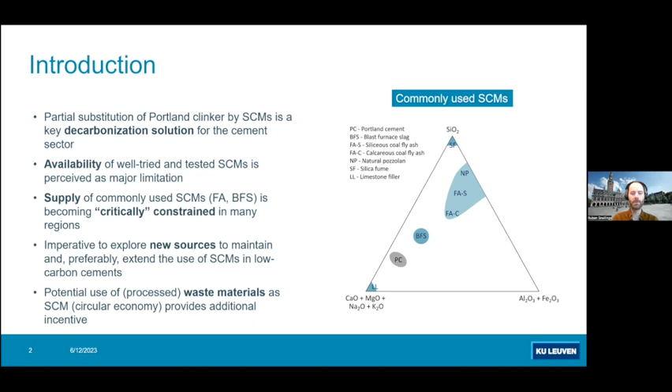When going through the literature, we try to make a classification of materials used today and materials that are emerging. By emerging we mean new materials that are fairly well tried and tested, but still yet emerging on markets - maybe not in Sweden yet, but for instance in France or the USA, they have been accepted by local standards.

In fact, it seems from the literature that most concerns in terms of their use have been resolved. Not all - there might be some open question marks, perhaps in durability, or some drawbacks, perhaps in workability and so on.

But what is striking, if we look at the chemistry of those materials we classify as emerging, is that they're fairly close still to the chemistries of the materials we know well - blast furnace slag, fly ashes, and so on. For instance, calcined clays are fairly close in composition to fly ashes, while recycled concrete fines are somewhere in between quartz and Portland cement, or silica and Portland cement.

So they all plot in this sort of upper part - I'm going to use the laser pointer - they'll all plot in this upper part of the ternary diagram.

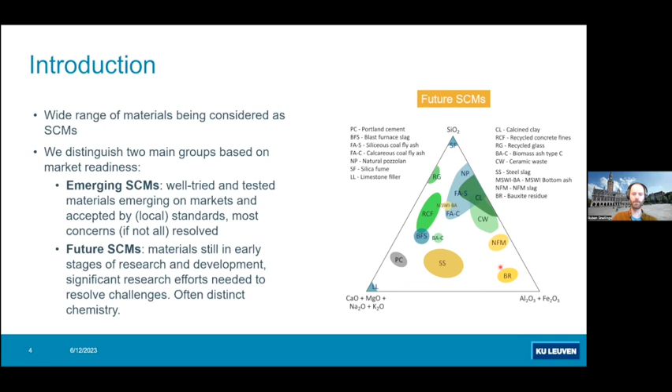An important point to make is that many of these materials require processing - we call that beneficiation processing. So from a waste material or a low value material, we process it and make it a suitable SCM. This area seems to be an area of intensive research.

Many researchers are looking into ways to upgrade or upcycle ashes or slags of some sorts, or even recycled concrete fines. And it's actually in the combination of the processing and then the properties of the end product that most innovation is happening today.

In general, if you look into what processes are being used, they could be classified as a function of their processing intensity. We can have fairly low intensive processing, such as drying and classification methods, which are used today. Comminution is also fairly common to the industry - of course, when we have natural pozzolans or slags, we might need to mill them to some extent.

But there's more intensive processing also being explored. Wet processing, washing, leaching in some cases, has been seen as quite effective in improving properties or resolving issues with some SCMs.

Carbonation - mineral carbonation - is something really in the spotlight today for recycled concrete fines, for instance, where the CSH or the calcium hydroxide is carbonated and produces a material which is both reactive and can store CO2. Moving up the ladder, we go into even more intensive, energy-intensive processing.

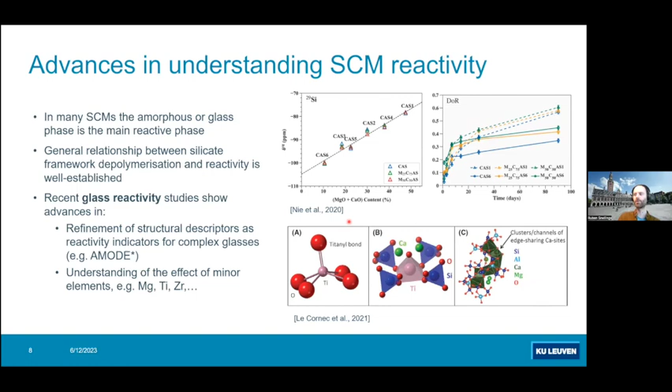So there's continuous advancement in really trying to understand the basics of the chemistry of reactivity of glasses and SCMs. But that's good to know. Obviously, in practice, we also want to have ways to evaluate them more directly in terms of performance or reactivity. And there's been, in the last few years, quite some developments in reactivity testing.

Reactivity testing of an SCM is obviously only a first step in a series of performance-based tests. So as you can see here, an SCM test is a first step, but screening is already very interesting to optimize processes, but also to eliminate off-spec materials or to focus on materials that are most of interest for cement and concrete producers later on.

Obviously, there are other key characteristics, durability, environmental compatibility, that need to be tested other than reactivity. But reactivity is often seen as closely linked to performance and durability, so a good indicator, at least, of what an SCM could do in a cement or in a blended cement.

So about these new test methods, there is a test method being forwarded by a RILEM committee and also adopted by ASTM now, which is called the R3 test. It's an SCM reactivity screening test in which the SCM is tested in a medium which is closely resembling the pore solution of a Portland cement.

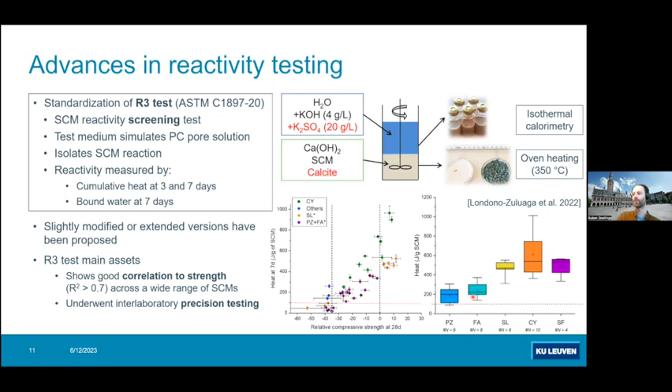And there's been an establishment of where typical materials would plot in terms of reactivity, pozzolans, fly ashes, slags, and so on. The R3 test can be extended.

There's some research on that aspect as well to measure calcium hydroxide consumption in the same mixes. This is a bit more challenging to measure accurately because we are in a mix where we have quite some calcium hydroxide from the beginning. So consumption measurements by, for instance, thermal analysis, are a bit more challenging.

But there's also good correlation to the heat release or the bound water there. But this depends a bit on the SCM composition. Obviously, if you have a slag which is calcium rich, it may consume less calcium hydroxide for a given degree of reaction than a fly ash, which is mostly siliceous.

Calcium hydroxide consumption can be interesting for some durability aspects which are particularly linked to calcium hydroxide presence, such as calcium oxychloride formation, where good correlations have been seen, and ASR expansion. Obviously, reactivity can give indications on durability, but it's not as easily linked as to compressive strength or other performance parameters. Durability depends on many different parameters and is in general more complex to understand.

However, screening a filler material from a reactive material is still very valuable because we know that cements containing reactive SCMs are usually more durable than cements containing fillers.

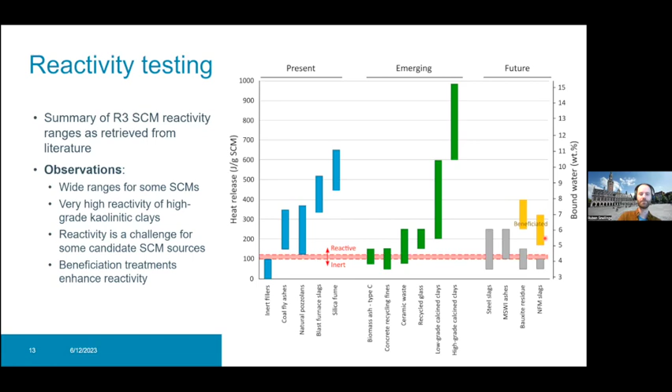Saying that, it's important to stress that it's not only reactivity which should be kept in mind for new SCMs, it's also environmental compatibility, health, environment, safety issues. These are imposed by legislation, so obviously we have to protect humans and the environment from potentially hazardous materials.

Methods are usually available and harmonized. Limit values typically are nationally imposed, and I would not know how it works exactly in Sweden, but in Flanders it works, in Belgium it works a certain way, in the Netherlands slightly different, and so on.

The typical parameters you might want to look at are heavy metal contents, and in particular whether these heavy metals are mobile. Emissions can happen during the first life when the concrete is in place, or during the second life when it's crushed and used again as, for instance, a road-base material.

Radioactivity is another one. Some of these SCMs, for instance these non-ferrous metallurgy slags, but also phosphogypsum, may contain traces of radioactive elements, so should be tested also in terms of gamma ray radioactivity.

And finally, it's also quite important to follow up on respirable crystalline silica content, where crystalline silica should be less than 10 weight percent in the below-10-micron fraction.

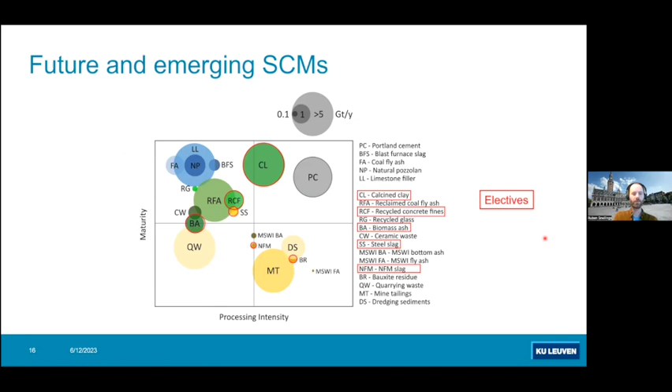There's not enough time to go over all of these materials. Calcined clays, I trust, if not me, somebody else will introduce. Calcined clays are one of the most promising SCMs in terms of reactivity, performance, and availability.

We see that these ternary mixes of limestone and calcined clay cements are really reaching the market today. Perhaps not in Sweden, but in Denmark, Belgium, France, many places in Western Europe, we start seeing the first calcined clay or limestone calcined clay cements reaching the market. So this is to some extent already known.

What we see beyond these LC3 cements is that recent studies show you could also try to use mechanochemical activation, so intense milling, as an alternative to thermal treatment, in particular for those clays that are a bit less reactive—the smectitic or illitic clays, not the kaolinitic clays.

Co-calcination of these so-called illitic or smectitic clays with some fluxes or materials containing fluxes such as calcium, sodium, or potassium can increase the reactivity by enhanced formation of reactive amorphous phases.

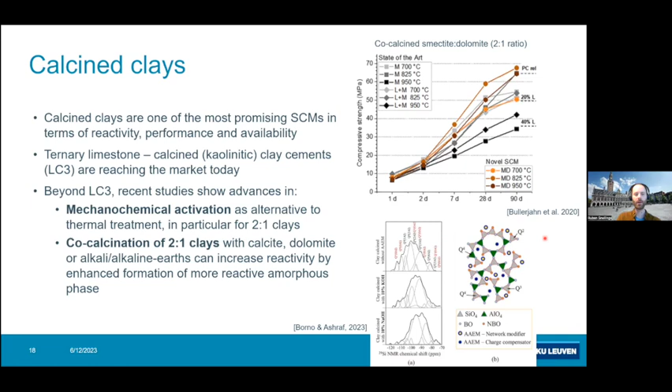A recent study showed that on a global level there's really large potential if one would be able to actually source and bring together all of these end products or waste products from biomass. You could have up to a billion tons of materials available every year.

However, that really makes abstraction of many other useful uses of these materials, such as soil amendments, and the fact that logistics can be really complex and costly. So it's still to be seen in what constellations biomass ashes can really serve as a good supply of SCMs. There might be local situations where this is actually useful, but in many places this doesn't make much sense.

On a material level, what's known from recent studies—and it's actually confirmed across a wide range of biomass ashes—is that depending on the biomass source, whether it's herbaceous, woody, or animal, you really have very different ash compositions. So you really have to be careful about what materials you're taking in and what the source of the biomass is.

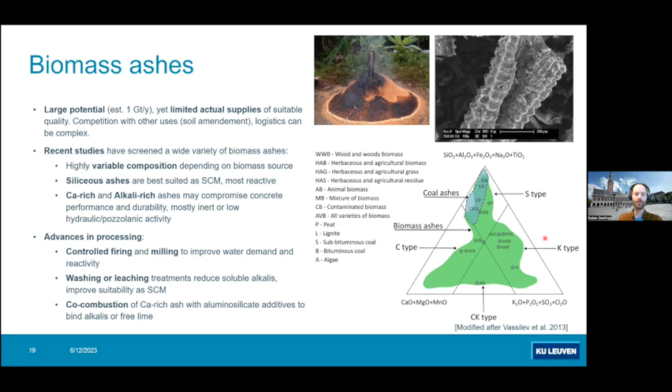If there are issues with soluble alkali, washing or a leaching treatment can help, as well as trying to co-combust. This is already done sometimes by standard in energy plants to reduce slagging of the ashes during combustion, by adding aluminosilicate additives. This can be other ashes, or clays for instance, which also produce a reactive material.

Another important one is recycled concrete fines. Obviously they're available in most developed countries and will become more available in the next decades as many structures reach end of service life and need to be refurbished, replaced, or recycled. An important fraction of concrete recycling are the fines, typically between 30 to 40 to 50% of the recycling output.

In many cases, when used, this is considered as inert. However, lately researchers, for instance from Heidelberg Cement, have intensively worked on carbonation of RCF, where using a wet or moist process they were able to make calcium hydroxide, CSH, or calcium aluminate hydrates in the RCF react with CO2 to form calcium carbonate and silica or alumina gels, which can be highly reactive.

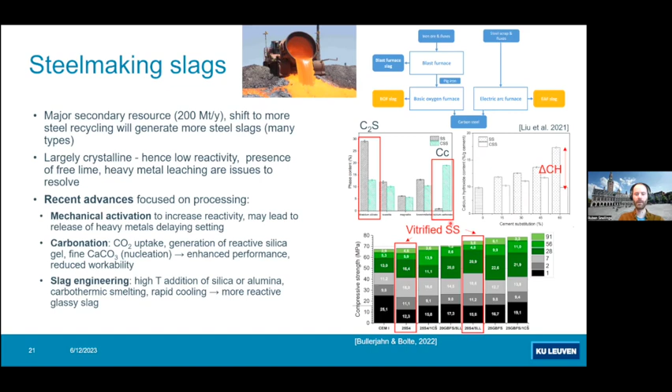Maybe to wrap up, a final one to go: non-ferrous metallurgy slag, something we have been working on a lot in Leuven as well. This is probably a more local secondary resource - we have a lot of it in Belgium, and I suppose you also have some in Sweden. The majority of this is generated in copper production, and it consists mainly of iron silicates. In its regular form it's a crystalline, hard material, used for instance for abrasive properties, and as given, these are very lowly reactive or inert, and might even have some slight retarding effects.

Recent advances go a bit along the line of what we've seen for steel slags, trying to modify the composition of the slag at high temperature - adding calcium and aluminum will have a massive effect on the reactivity, creating a more reactive material. If you then quench the slag, making it amorphous, you retain reactivity and strength contribution. Typically this strength contribution would be comparable to siliceous fly ashes. On the other hand, you resolve the issue that many of these slags don't currently have applications. It should be said they have significant levels of heavy metal, so if you can reduce heavy metal leaching, or recover heavy metals at the same time, this is beneficial. What's interesting is that the chemistry is quite different - it's mainly iron and silica, and divalent iron seems to be mobile in the reactions and can be incorporated into a new type of layered double hydroxide, a bit like an AFm structure, amongst others.

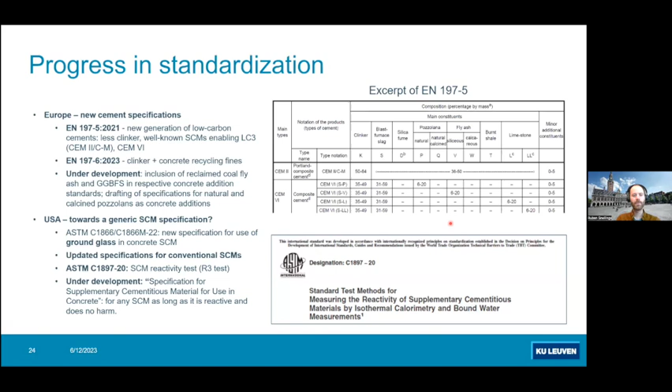Perhaps it's also interesting to look across the Atlantic. There we have the move towards new specifications for ground glass, updates on conventional SCMs, the introduction of the reactivity test - the R3 test - and the development of a general or generic specification for SCMs for use in concrete, for any SCM regardless of its origin. That's actually also perhaps one of the ways forward for new SCMs - not only to adopt materials that have been accepted in cement standards, in concrete standards and beyond. That's an obvious first step to facilitate this, but also to provide better guidelines for what we need to comply with if we develop new SCMs, and how to introduce them.

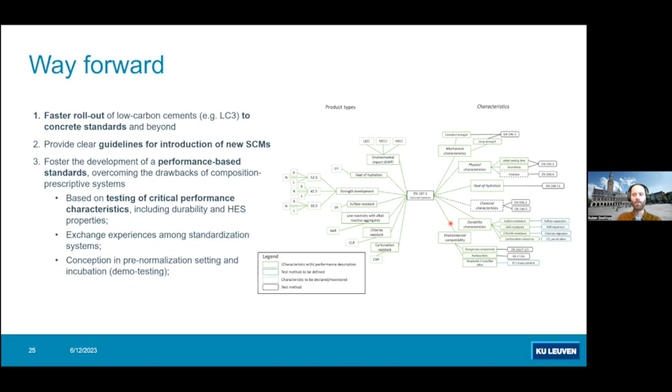Finally, a more audacious step is to try and foster the development of a performance-based standard also on the cement level, that will try to overcome some of the drawbacks of the current composition-prescriptive system, where we have this plethora of different SCM cement types that we have to specify again and again, which might become quite complex and confusing in the long run.

So my conclusion is that there's a transition to new SCMs that is gaining momentum. We see global emergence of previously only locally used SCMs, off-spec materials being used, novel combinations being introduced, and also some new SCMs such as glass pozzolans or concrete recycling fines starting to emerge.

For other SCMs, we see there are some challenges that need to be resolved, typically low performance, and incompatibility, including environmental incompatibility. This implies that if we want to use such materials with these challenges, we will need to adopt intensive processing beyond the milling that we do today, and cement producers may need to move a step further into also processing their SCMs rather than just adopting them into their processes.

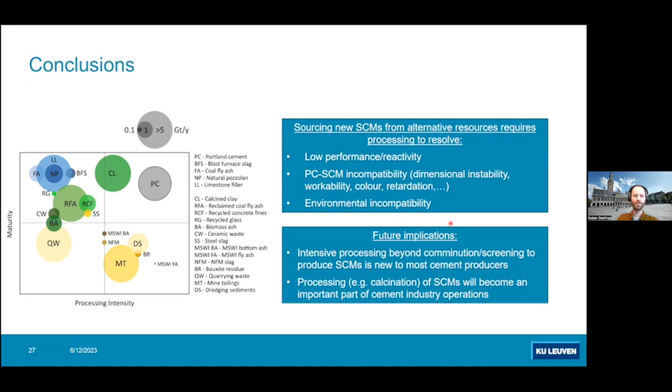Thank you, Ruben, for a very nice presentation. As we can see, there's been quite a lot of development. Since we're a bit short of time, I'll ask one question, and the audience can send questions to me, and we'll see if we can answer them.

Looking into the cement industry's roadmaps that have been developed, looking at what they think about alternative binders, they seem to think this has quite small potential, talking about 5 to 10%. What do you think about the future? Will we see more blended materials?

Yeah, in my view, their position is quite conservative on this respect, and I think there's much more possible, maybe even double or triple that, by moving towards really low clinker blends. I think in the development of the roadmaps, the SCM part has mainly considered these current well-known SCMs and their supplies. There you're more limited, because you won't find much more GGBFS, you won't find much more coal fly ash around. So I think this was the main limitation. I would expect that we could do more in terms of clinker replacement, actually.

That's really good news, I think. Okay, thank you, Ruben, for a very nice presentation, as I said, and then we give the word to Klaartje.

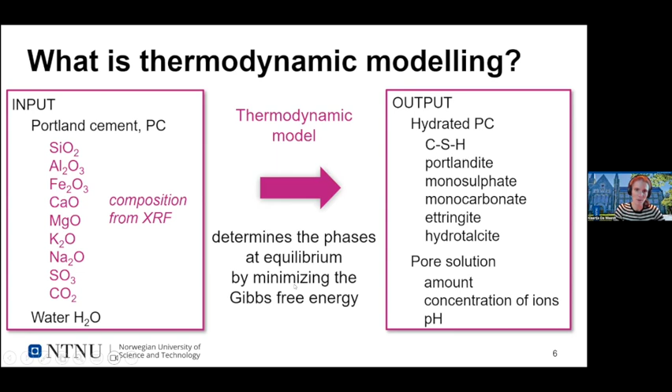So this is actually what thermodynamic modeling does. It calculates, based on this input, the output, and determines the phase assemblage at equilibrium by minimizing the Gibbs free energy. In order to do these calculations, we need thermodynamic data of the phases that form and also of the aqueous phases. This thermodynamic data allows us to calculate which composition of these phases will give us the minimum Gibbs free energy.

The most recent one is Cemdata18, and it gives us the thermodynamic data of your AFM phases, AFT, hydrogarnet, CSH - the typical phases you would find in a hydrated cement. All this data comes from solubility measurements at different temperatures where you also analyze your solid phases, so a lot of work lies behind that data.

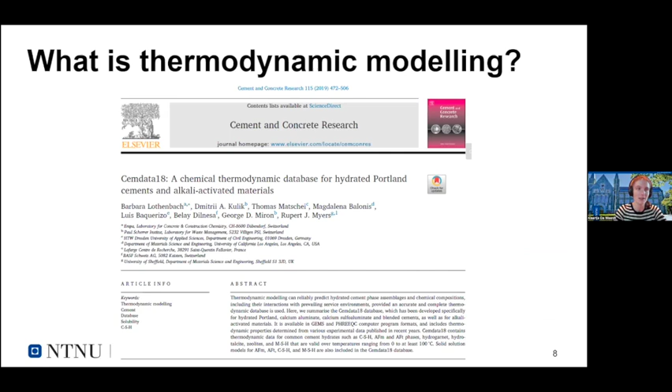The wonderful thing is that all this data is available for all of us. Cemdata18, the most recent cement-specific thermodynamic database, is published in Cement and Concrete Research. In this publication you'll find tables with all the typical hydration phases in a hydrated cement - for example AFT, hydrogarnet, AFM - and you'll find your Gibbs free energy of formation, enthalpy, entropy, temperature coefficient, and molar volume. And not the least, you get to know who did the hard work to get you those numbers, so you get the references of the publications. Note that some of these lines represent work for an entire PhD.

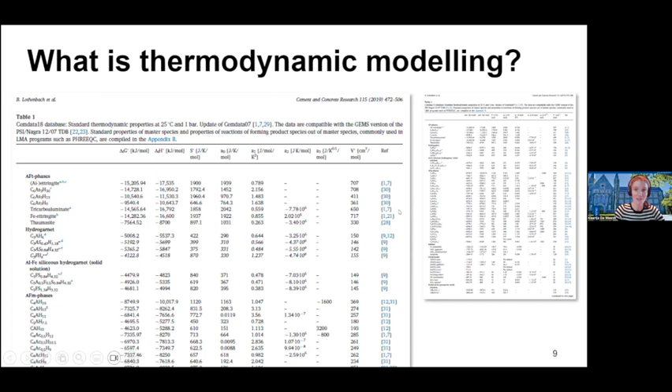So now we have all the tools to do thermodynamic modeling. Let's try to do this for a Portland cement. We need the composition of our Portland cement to calculate the hydrated assemblage and the pore solution.

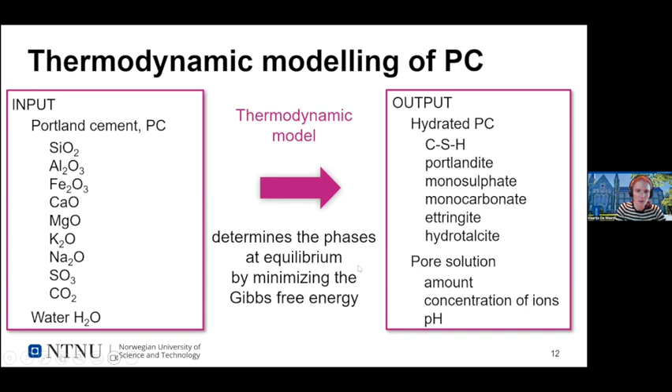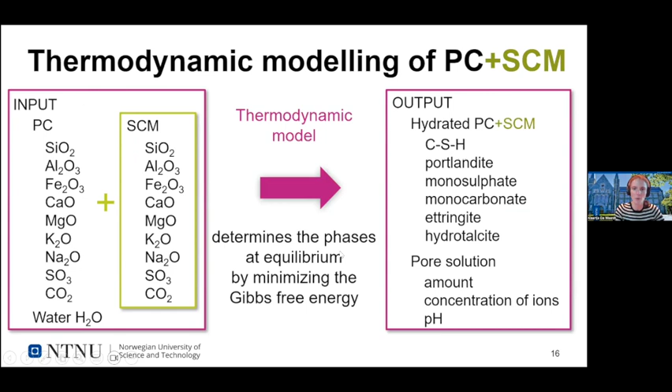So this is what I could do for Portland cement. What happens if we want to include an SCM, a supplementary cementitious material? We need to know the composition of our SCM. We could add it also as an oxide composition and then see how it influences the output of our thermodynamic calculation. But here is a tricky part.

What do we enter as the SCM composition? You could use the entire XRF, the total XRF of your SCM, but as Ruben said earlier, quite a bit of it can be crystalline and inert. So if you're able to quantify the crystalline non-reactive phases - just as examples, quartz, mullite, hematite - you could check the oxide compositions of these and subtract them from the total oxide composition of your SCM, thereby getting an idea of the composition of the reactive part of your SCM. Then include this into your thermodynamic modeling, because that's actually what's going to go into the system. But this can be a bit challenging.

When we've done that, here on the left we have the figure for pure Portland cement, and on the right I've replaced 30% of the Portland cement with calcined clay. You can see that this changes the oxide composition of your total cement, giving less calcium oxide and more silicon oxide, aluminum oxide, and iron oxide. Again, I let it react with 50 grams of water.

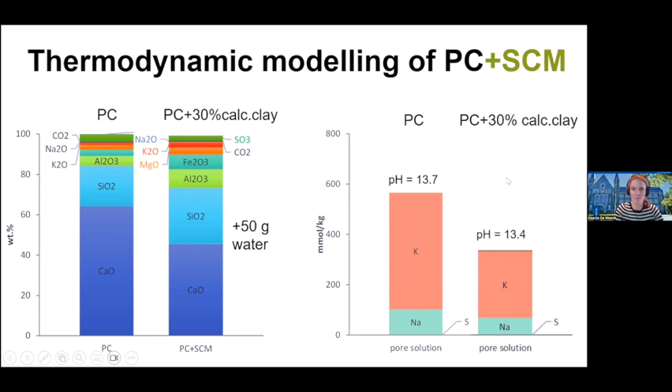So you can see that the pozzolan or the SCM greatly affects your phase assemblage. It doesn't only affect the solids, it also affects your pore solution composition. Comparing pore solution compositions, the calcined clay considerably reduces the potassium and sodium in your pore solution, and thereby also the pH. These are also things you can use CemGEMS for, to calculate how that would change depending on your SCM.

So this was a very fast crash course on how we use thermodynamic modeling to look at hydration and how SCMs affect our hydrate assemblage. So how can we use this in the context of concrete durability? I'm going to give three brief examples of how we've used thermodynamic modeling to look at durability. But there's much more. Because of time limitations, let's look into these three examples.

First, alkali silica reaction, or ASR, and a very brief repeat of what ASR is. We need alkali originating from our cement, which lead to the high pH of the pore solution, as we just saw. We need the presence of excess moisture, water, and a reactive rock containing reactive silica. This reactive rock will react in the high pH environment and with the additional water to form reaction products such as alkali silica gel. ASR leads to expansion and cracking of the concrete. It's a slow reaction, but we have quite some trouble with it here in Norway.

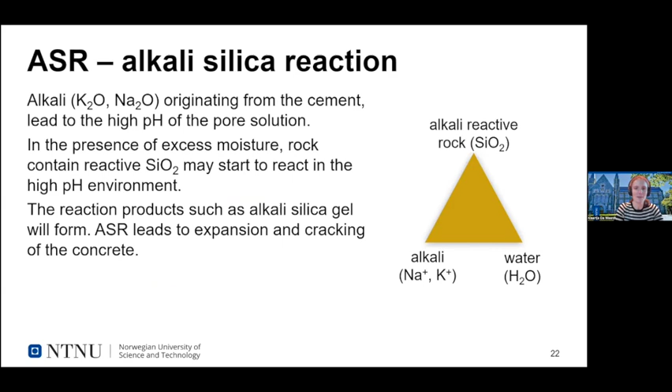But where do SCMs come into play here? The role of SCMs when it comes to ASR is they can reduce the alkali concentration in the pore solution and thereby mitigate these deleterious expansions. So the SCMs will reduce the amount of available alkali for the reaction.

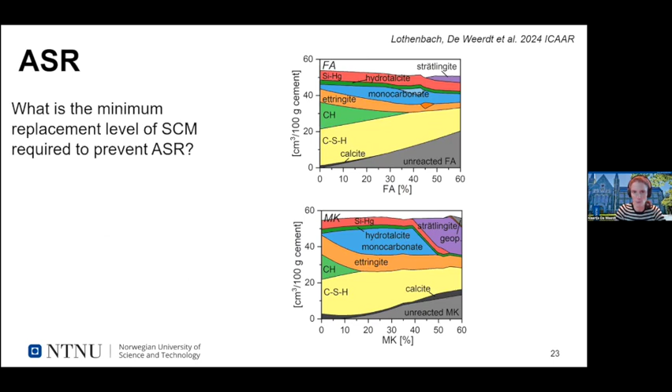This is something Barbara and I wanted to look into in connection with a publication we wrote for the upcoming ICAAR conference. We wanted to determine the minimum replacement level of SCMs required to prevent ASR. In other words, we want to know which replacement level lowers the alkali level in the pore solution below a specific limit. Here we assumed 300 millimole per liter. We did some literature search, and this is a lower limit that counts for many aggregates, but note that this limit is dependent on how reactive the aggregate you're looking at is. But we took, for simplicity, 300 millimole per liter.

We used SCMs to see how the replacement level of various SCMs affects the alkali concentration in the pore solution. Here I just took a few examples, but in the paper there are more. We did this for fly ash and metakaolin. What we do is look at the volume of the hydrates formed per 100 gram composite cement, and we vary the replacement level of the Portland cement with fly ash, going from 0 to 60 with fly ash and 0 to 60 with the metakaolin.

When we look at the hydration phases, you can see that the pozzolanic reaction of fly ash and metakaolin leads to the consumption of your Portlandite, as we've seen earlier with the calcined clay. Then you get more CSH and more AFM. You can see this even clearer for the metakaolin. Also note that we put a limit to the reaction degree of the fly ash and the metakaolin, and that's actually based on one of the figures Ruben showed in his talk.

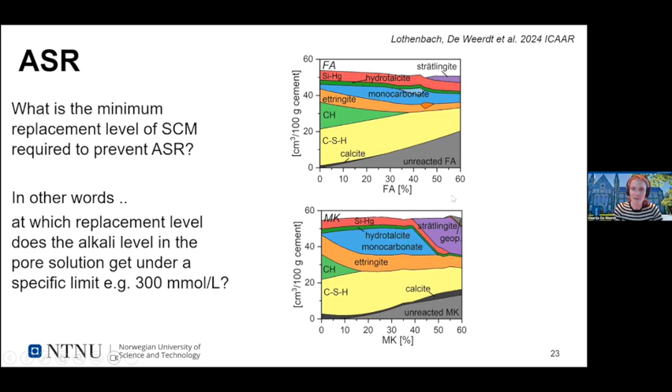So here we have the phase assemblages and how they change with the replacement level. But what we're actually after is how that affects the alkali distribution. We know that sodium and potassium will distribute between the pore solution, CSH, and the unreacted Portland cement and SCM.

Here I show the example for fly ash, and I split up the effect for sodium and potassium. When we look at potassium, we see that a large part of it is in the unreacted fly ash, part is in the CSH, and part can be found in the pore solution.

When we plot the potassium and sodium concentration in the pore solution as a function of the replacement level, I did this for fly ash and metakaolin. You also see some points here, which is experimental data we found in literature. The green line is for sodium concentration, the blue for potassium, and the red line for sodium and potassium concentration in the pore solution as a function of replacement level.

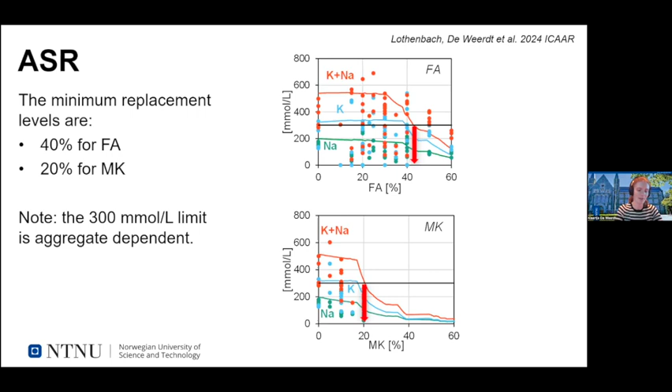We assumed a limit of 300 millimole per liter, shown as the slightly thicker black line. What we can see is that for fly ash, the total alkali concentration in the pore solution drops below this 300 millimole per liter at a replacement level of approximately 40%, whereas for metakaolin this already happens at a replacement level of 20%. This gives an indication of how much SCM we need to include in our system to try to mitigate ASR, and there GEMS can be a very neat tool.

So this was an example for how we use thermodynamic modeling to predict potentials of ASR and the impact of SCMs. Now let's look at an example for carbonation.

We looked at a pure Portland cement and a Portland cement with 30% fly ash. We simulated carbonation by exposing the hydrated paste or mortar to increasing levels of CO2, starting with 0 grams CO2 and increasing the level our cement paste or mortar is exposed to, then calculating the equilibrium phase composition upon exposure to this CO2.

Focusing on the Portland cement, the first thing that happens upon carbonation is that Portlandite is predicted to decompose and form more calcite, the darker green phase. In order to have all Portlandite reacted with CO2, we need a certain level of CO2. For the fly ash cement, the pozzolanic reaction has already consumed quite a bit of this Portlandite, so we need much lower levels of CO2 to consume all of it.

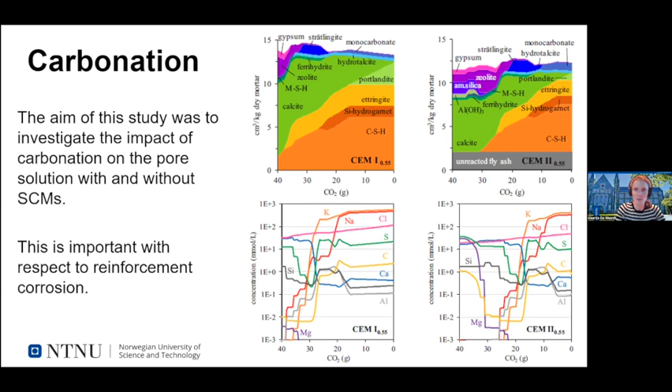But in order to know which phase assemblage we approximately had in our fully carbonated mortar, since we combined this with experiments, we matched the carbonation state in our experimentally exposed samples to the calcium carbonate level which was modeled - the model calcium carbonate level is the green line. We had measured in our fully carbonated mortar a level of about 20% calcium carbonate, so our fully carbonated mortars were equivalent to the phase assemblage at about 34 grams CO2.

We did the same for our fly ash cement. We had less calcium carbonate there, with an equivalent CO2 level of about 27. So in these graphs we're approximately at this phase assemblage, and then we extracted the pore solution composition at this point and compared it with some experimental results.

This is where Gilles used his cold water extraction technique to try to obtain pore solution composition in these carbonated mortars, and we compared the experimental results with the modeled ones.

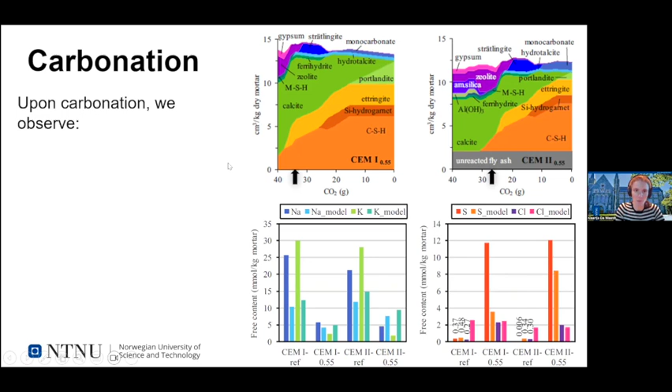The first conclusion is quite obvious. When we compare the references, non-carbonated with the carbonated ones—blue bars for sodium and green for potassium—we see a decrease in sodium and potassium in both investigated cements. A decrease in available sodium and potassium means a decrease in OH minus, and therefore a decrease in pH and a depassivation of our steel.

But that we knew. What was nice was that we could actually see where the alkali went: they go to the silica gels, which absorb the alkali.

A more striking thing was that we observed, upon carbonation, an increase in sulfur and chlorine in our pore solution, and that was both measured and predicted. Having an increase in sulfur and chlorine in your pore solution will actually aggravate your corrosion, and that's an important parameter to be aware of.

In this case, we didn't see a very clear difference between the two binders investigated, but this might be very relevant for new SCMs, which potentially have more sulfur or chloride available and might affect corrosion rates in carbonated concrete. So this was an example on carbonation and how we use thermodynamic modeling to get a better understanding of the mechanisms.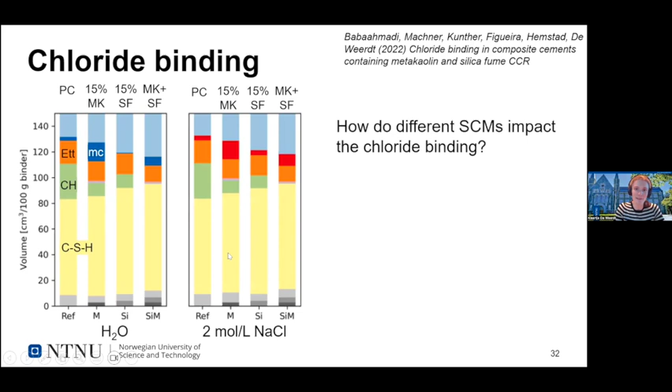When you compare the figures on the left with the ones on the right, the main difference is that the blue boxes turn red, and red is Friedel salt. It's actually in the same family as monocarbonate, but instead of containing carbonates, it contains chloride. So GEMS predicts that most of the AFM goes to Friedel salt.

So how do these SCMs affect the chloride binding? When we have aluminate-rich SCMs such as metakaolin, we'll form more of this AFM, and more AFM results in more Friedel salt and thereby more chemical binding.

But the problem is GEMS doesn't tell us anything about the physically adsorbed chlorides, because that's not included in the current CSH model. So we can't say how these changes in the CSH affect the physically sorbed chloride.

So when Arezou in her study wanted to link these phase assemblages to the binding isotherms—where she measures the amount of chloride bound per gram dry cement when varying the chloride concentration—she couldn't match these binding levels with the phase assemblages predicted by GEMS.

The reason there is no direct link between the GEMS model and the binding isotherms is that we observed the chloride concentration, or chloride content, in the AFM actually varies, and it's not necessarily the value you get from GEMS. You're also not accounting for the role of CSH in the physically adsorbed chlorides. So we need some more research on some of the thermodynamic data to be able to do this.

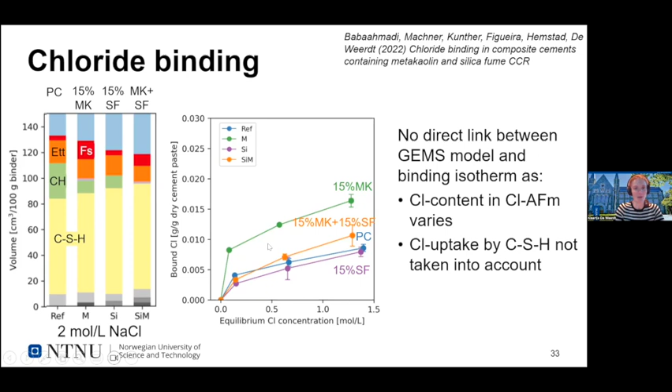So those were the 3 examples of how to use thermodynamic modeling in the context of durability, but you could do similar approaches for sulfate attack or leaching, and there are several publications on this, so if you're interested, just reach out. As I mentioned in the start, I'm a researcher, so I need to close off with where do we need more research?

I don't want to get unemployed. First, a little bit on the limitations of GEMS, because GEMS is a wonderful tool, or thermodynamic modeling is a wonderful tool, but be aware that you need correct input. So you need to actually have a good characterization of your SCM to know what the reactive composition is.

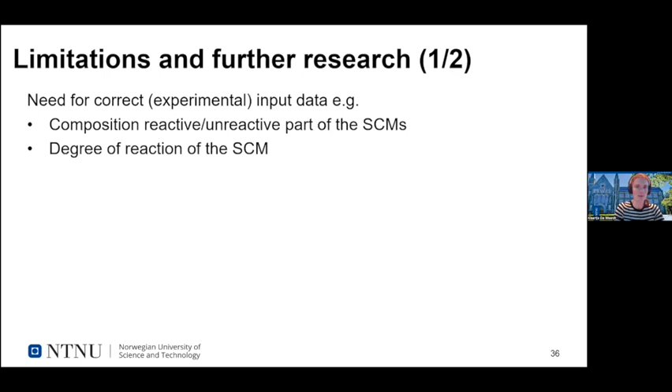And you also need to actually give GEMS the degree of reaction of your SCM, because GEMS does not account for kinetics. And know also that if you don't have thermodynamic data of a hydration product or a reaction product of a deterioration mechanism, GEMS will not be able to predict it. It only predicts the phases you have given it thermodynamic data of.

So that's why I really want to stress that you always try to combine GEMS with experimental verification, so you can identify the reaction products you predict. And similarly with the pore solution composition, it's a very nice verification of your model.

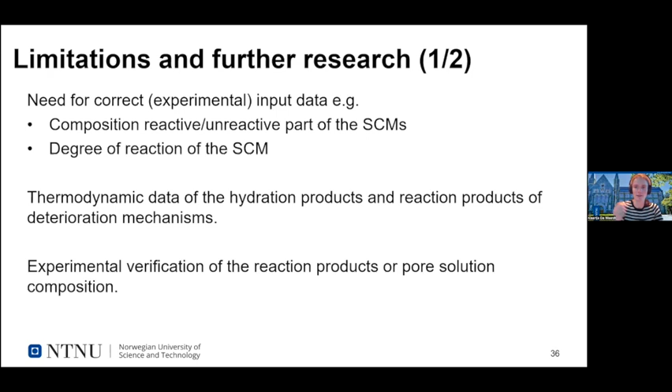I mentioned when talking about carbonation that the thermodynamic modeling can show or indicate a pore tightening effect. But there it's important to be aware that thermodynamic modeling only predicts the total pore volume. It doesn't give you any information on pore connectivity. So if you want to do transport modeling, you should combine your thermodynamic modeling with a transport model and with a characterization of your pore connectivity, because GEMS can't do that.

And then finally, the further research. What I tried to show with the chloride binding example is we need more thermodynamic data on CSH. In all the examples I've shown, you see that CSH is the main hydrate. Currently the model doesn't account for aluminum uptake, sulfur uptake, and chloride uptake in CSH. And as it's the main hydrate, small variations in uptakes of these elements will actually affect a lot the hydrate assemblage you predict. So I want more work on that, and I'm in for it.

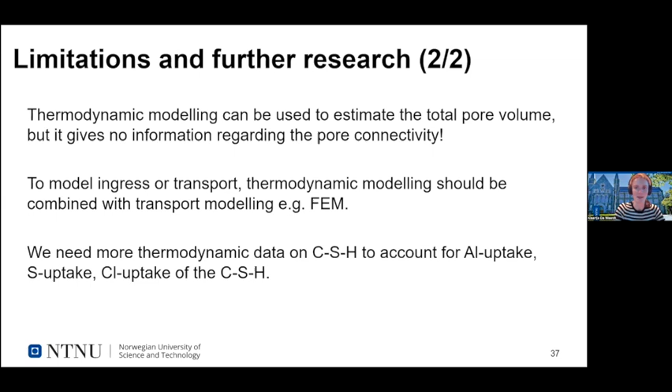So that brings me to the end of the talk. When talking about thermodynamic modeling, I have to say a big thank you to Barbara Lothenbach, who introduced me to GEMS, and who's a wonderful person to work together with. She has a part-time position at NTNU, and I'm very happy about that. And I also want to thank former supervisors who supported me collaborating with Barbara, and not the least colleagues, PhDs, postdocs and master students who have helped me do this work or have done most of the work. And then also not least the projects which have made it possible to do this research.

So that was, here you see Barbara in the middle of this picture. Besides GEMS, she also likes to walk in the mountains. So that was it from me.

Are there any questions? Or am I going over time? Thank you, Claudia. You're a bit behind the schedule, but I'm sorry. No, I was expecting that. I was too ambitious with the schedule.

So we have 2 minutes for questions to Claudia, if anyone has any. If not, then I'll start at least and say thank you for the nice presentation and for showing how useful this type of tools are.

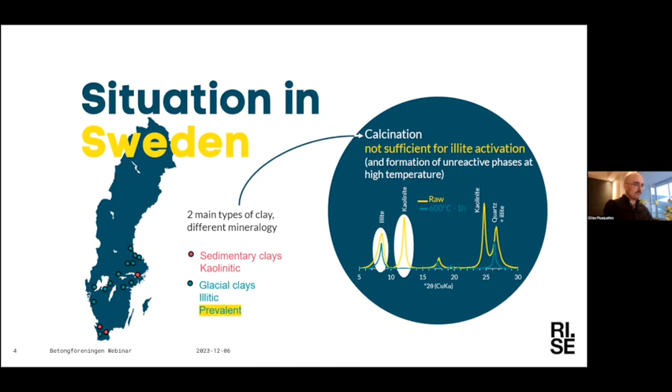We are still playing with the parameters here, so it's not optimal let's say. But the idea here was to give enough energy to the system to have this phase transformation, but without having the formation of unreactive phases that I mentioned before.

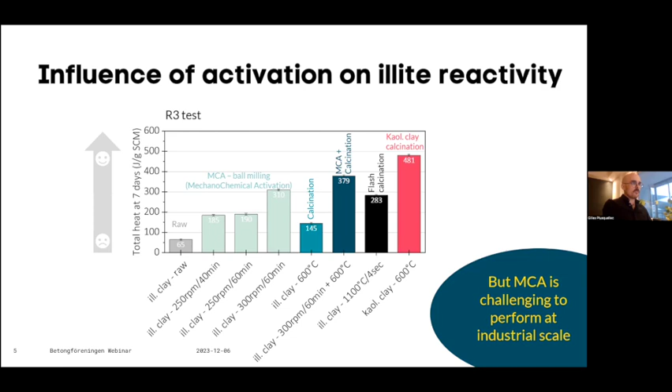And in all of those methods, flash calcination is something that is doable at industrial scale. So it looks like a perfect match to activate this type of clay. Especially since, as I said, we can still optimize those parameters and reach something even higher here.

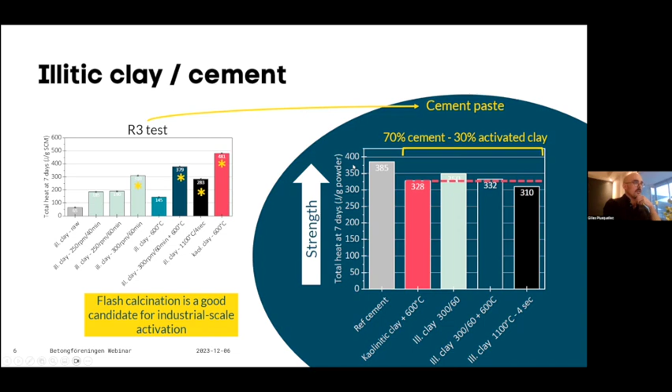Now I'm going to give some indication of the performances we can hope for when using this kind of concrete with clays. I'll show values for kaolinitic calcined clays with this specific binder mix design. For the binder, we have a replacement rate of about 50%, with 30% calcined kaolinitic clays and 15% limestone. The results really depend on parameters like the water content and the type and amount of admixture used, but it still gives an idea of what we can reach.

So first for the strength: on concrete cubes at 28 days, we can reach a strength of up to 84 megapascals, which is not bad at all, quite high even, I have to say.

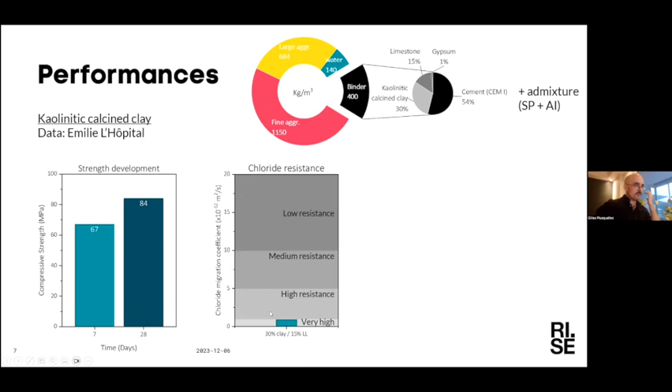And we looked at some durability resistance as well with accelerated lab tests. Here's the result for chloride resistance, and we place ourselves in what is considered a very high resistance material. For carbonation, we're in a more normal resistance area.

So with this kind of material, we can have high replacement of cement, and this is still linked to great performances. We will still have to do this work for illitic clays, for example after flash calcination. And of course, this is also linked to a really big decrease in CO2 emissions, about 40%.

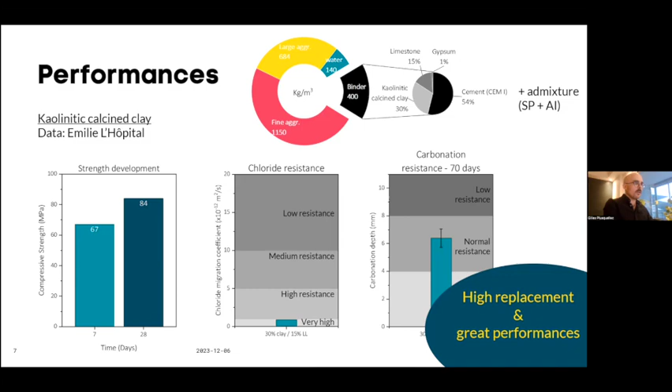Yes, so that was for the clay. Now we can go to what we are doing, or what we have done, for the steel slags. As I mentioned in the introduction, we have quite a bit of steel slag that is produced. But this high amount actually isn't just one product, but represents a variety of products depending on how they are made. Ruben also presented the different types of steel slag we can have.

The cooling will also have a big importance. So depending on what type of slag we have, the use we can make of it will of course be different - as an SCM, filler, or aggregate - it all depends on how it's made. Some issues have also been indicated when we talk about SCM, which I'm focusing on today. One is lower activity - for example, you can have the formation of gamma C2S, which is known to be not reactive, so if you have a lot of this phase, it's a bad sign, at least for use as SCM. Or there's the expansion problem if you have a lot of free lime or free magnesium oxide.

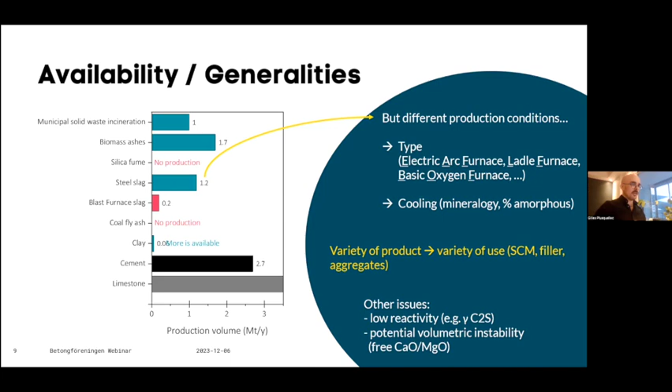I'm going to give an example now of what we did with a sample coming from an electric arc furnace and a tunnel kiln, from the same plant but just a different product line. Still at the cement paste level with 30% replacement, and to follow this we measured the heat released by isothermal calorimetry. The results are presented here along with 100% cement paste.

So I mentioned earlier that this kind of value can be directly linked to the strength. But in this case we have to be careful, because if we have, for example, free lime, this kind of material, when mixed with water, will give a really high exothermic reaction. So that will impact a lot the total heat that you measure at 7 days.

That in this case will not be directly transferred to strength. So we need to look more at what is formed. We did some TGA and XRD analysis over different time periods. Here I show the TGA result in terms of evolution of Portlandite content, or hydrated water, which is directly linked to the amount of hydrated phase formed.

For the first steel slag from the tunnel kiln, what is mainly formed is Portlandite. We also have some in the original raw material, but some is clearly formed over time. We also detected a limited amount of extra formation of AFM phases compared to the reference. This was done by TGA and XRD, but it's not shown here.

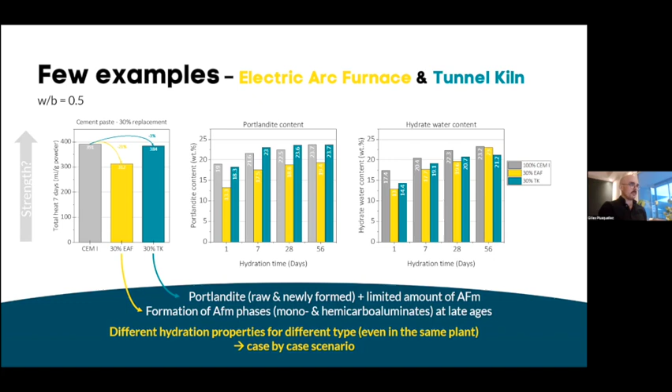We made some strength development measurements on mortars. Unfortunately we don't have the late value for the electric arc furnace steel slag. But for the tunnel kiln at 90 days, we had a decrease compared to the reference of about 20%, which is maybe not that great. But for the other one, we would expect a stronger strength increase because of this later reactivity that I was mentioning before.

Although I think it's not an extraordinarily good result, this was using the raw material without any treatment or pre-treatment whatsoever. So this could actually be improved quite a bit. There are many possibilities for that.

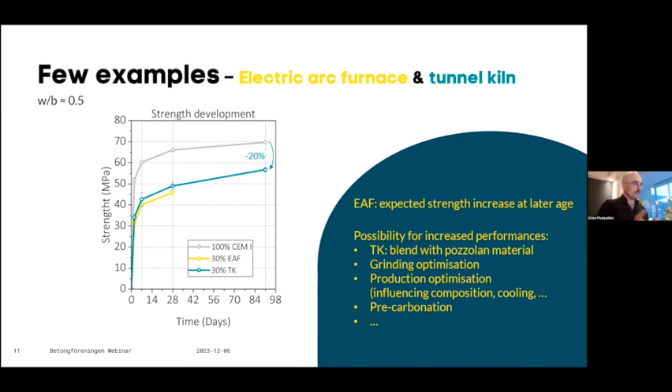In this specific case for the tunnel kiln, one possibility would be to mix it with a pozzolan material because of all the Portlandite that was formed, or already present from the beginning. It's also possible to do a grinding activation, leading to a more homogeneous, finer material which will be more reactive and have improved hydration properties. It can also solve the expansion problem, especially in the case of wet grinding, by getting rid of the free calcium oxide.

You can change the actual way the slag is produced. By direct collaboration with the producer, it's possible to influence the chemical composition and therefore improve the hydration properties. If you fasten the cooling, you get more amorphous content, which is also something we want. Precarbonation would also help for hydration because it can lead to the formation of an aluminosilicate gel layer at the surface of the particle. That's something you would like to do, and it's very good also in the way for CCU and CCS.

Precarbonation can also help with the expansion problem by turning the free lime into calcium carbonate. So those are a few examples that we are working on. Sadly, I cannot share data on those, but those are the leads we are working on.

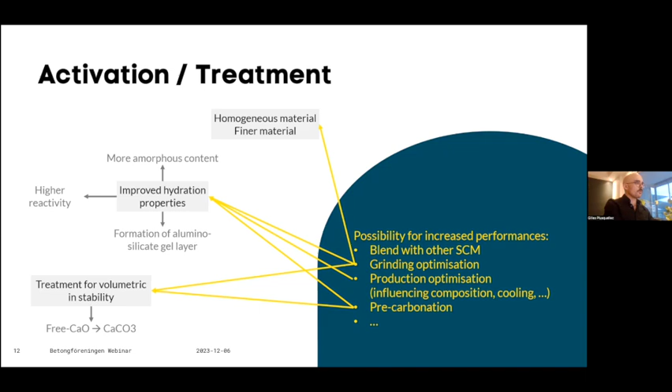Now for the last part I wanted to show, the biomass ash. We have an ongoing project in which we are retrieving a lot of different ashes from many different companies all over the country. We received either fly ash, bottom ash, or a mix of the two, mixed ash. All of those come from different types of producers: energy producers, pulp and paper, or municipality. So we have a lot of different raw feed.

Depending on what was used to make those ashes, we made a pre-screening. Everything that comes from recycled wood we put aside, because then there was a risk of paint containing heavy metal, which you don't want to have. But still, because of all this variety, we were a bit afraid of the variation in composition of all those ashes, so we made constant analysis of every sample we get.

Here is an example of the composition in terms of silicon, aluminum, and calcium oxide for different plants. All those different labels, E2, E1, E4, represent different plants. And if one group has 7 bars, that's because we also made the analysis at different times during a year of production.

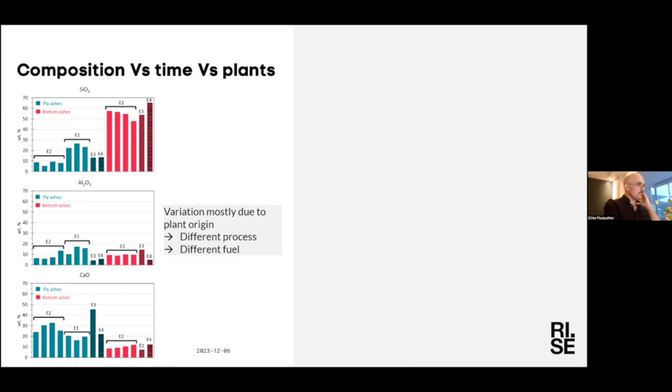Of course, we have all other components that we don't want to have, such as alkalis, chloride, or sulfate. So you need to recondition the ashes. We did that with some washing, and we're studying the different parameters, such as the liquid to solid ratio, the time of the leaching process, how many times you need to do it.

But it still seems that in most cases, we can get rid of them and be at a good level. The idea to follow that, to compensate for these two problems - in terms of if we have too much of the undesired component even after washing, or if we also have too much variation between the different plants - was actually to make blends of different sources to kind of flatten out all those differences. So we made some tests, more full analysis on different blends.

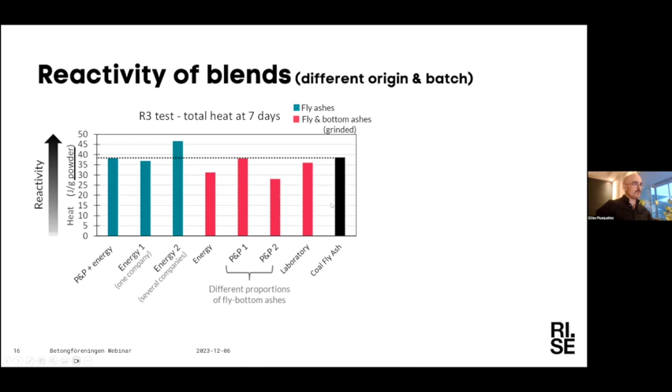I will go quite quickly there. So it's different blends, either just fly ash or fly and bottom ashes of different types of industry. And we compared them to a commercial coal fly ash. The result was actually quite good, with some blends having relatively similar reactivity to the coal fly ash, or even higher in some cases.

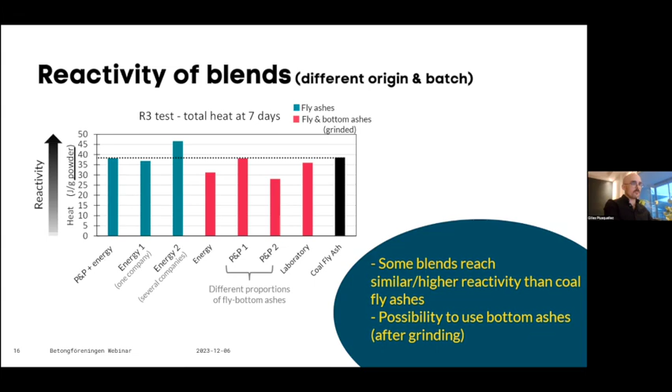And it could also show that we could use the bottom ashes after grinding, of course, which was actually a bit of nice news, because in the total production of biomass ash, it's the bottom ashes that are made in the most. So it's good to know that we can actually use them as well.

And now what we think in terms of strategy for the future, it's to make some kind of categorization of the ashes in terms of composition, of how easy it is to retreat them, how reactive they are, and to explore different scenarios in terms of making blends. Maybe make regional blends to also decrease the transport that will be needed, or one big national blend, or blends depending on different quality to make different products, but then one would have to think about what criteria we want to have.

Yep, so that was the brief overview of what we are doing at RISE. And so here are the names of my colleagues who work on the different types of materials that I mentioned. So if you want to get in contact, don't hesitate.

I also wanted to mention the project BEDCRIT, which is a national project that brings together the entire value chain for cement and concrete with the goal of having a common climate neutral strategy to reach a climate neutral production. This includes, of course, the use of SCM, and it also promotes research on new types of SCMs.

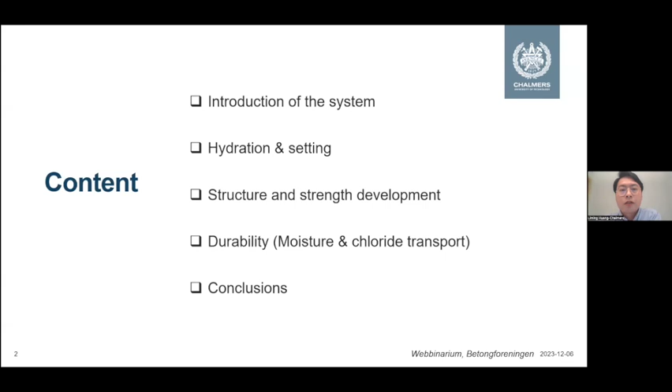I will first start with a really short introduction of this system, mainly about in situ monitoring the electrical conductivity of cement-based materials, as Ruben also said in the previous presentation. Bulk resistivity is a good promising parameter for assessing the reactivity.

We have established this system based on the Wenner method to monitor the electrical conductivity of cement-based materials. We have 2 outer electrodes to give power, and the inner 2 as signal collecting, to collect the voltage difference between 2 points inside the concrete specimen.

We have this version upgraded from the lab toward on-site monitoring. We also include a temperature sensor on one side of each layer to measure the temperature, so that we can normalize the result at the on-site to a reference temperature for better comparison. That's the brief introduction of the system.

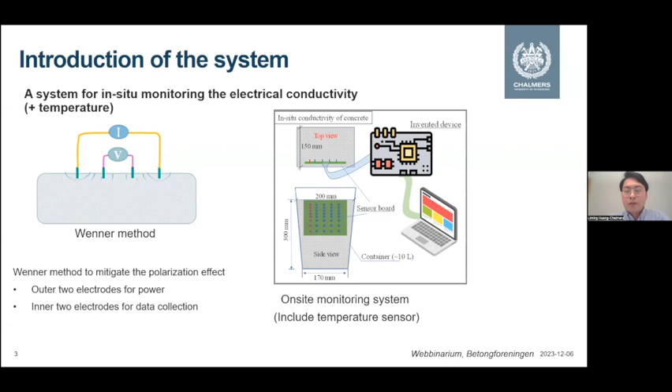I also want to say some words about why this conductivity works for monitoring performance, like strength and durability index, because we can simplify a concrete system into 2 main components: insulative and conductive. The insulative part is mainly the dry solid, and also includes some air inside or empty pores. The other part is conductive.

We can simplify it, classify it as liquid pore solution. Of course, we include some part of interlayer water from the CSH or other layered structure hydration products, but to simplify, we classify them into the liquid pore solution part. So during hydration, drying, or the ingress of chloride, the volume of the conductive component, and also its concentration, will change, so that we can follow them by the conductivity change.

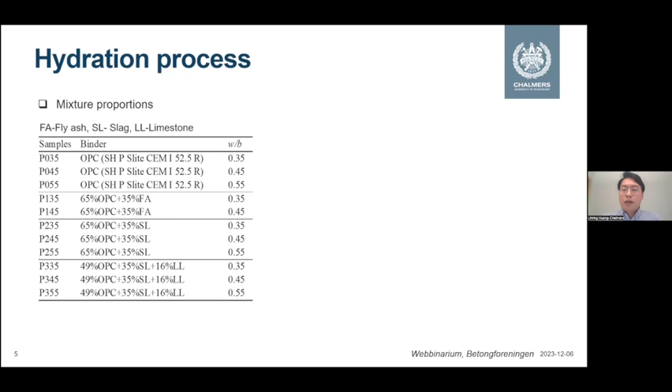To validate this test system, we cast 11 samples using the same binder with 3 different water-to-binder ratios. For the SCMs, we used well-known types like fly ash, slag, and limestone as filler in the P3 series.

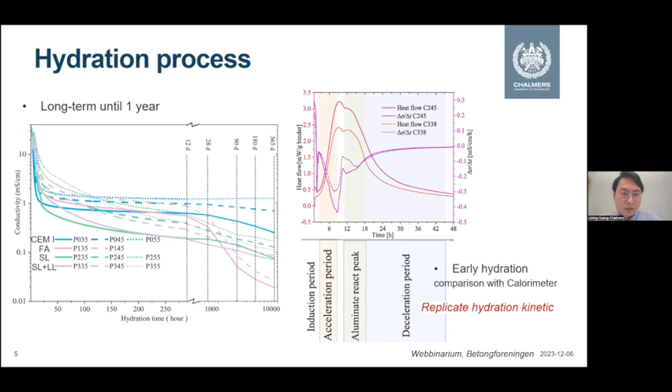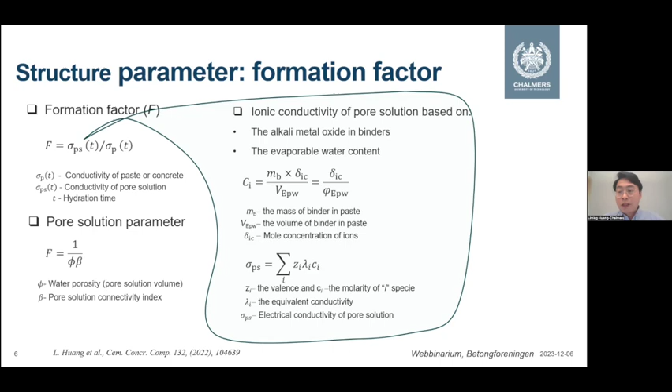For the conductivity of pore solution, we can estimate or assess it by the concentration of ions in the solution, which can be basically predicted or calculated using the composition of the binders and the amount of evaporable water. I will not go into the details because of time limitations, so if you are interested in the process, please read the details in our publications.

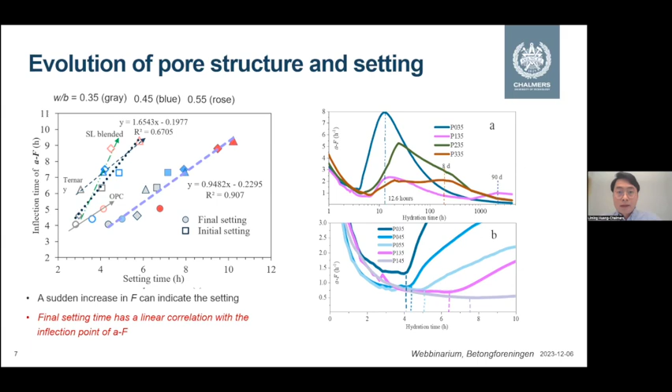We connected the inflection point of AF to compare with the final setting time and initial setting time measured by standard methods. We see that the final setting time has a good linear relationship with the inflection point time of AF, which means these measured electrical properties can reflect the setting process of concrete with different SCMs, which is also critical for implementation of SCMs.

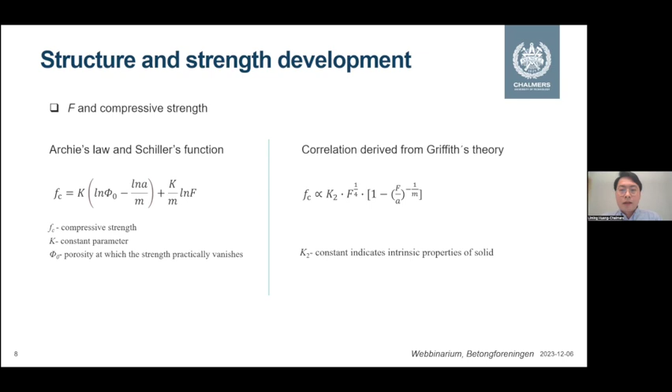So after final setting, what we care about is the strength development. Here we try to extract the correlation between the formation factor, or actually the porosity of the system, and the compressive strength. I just show the final results, the deduced correlation between the formation factor and the compressive strength. For details, please check our publication. But in general, we try to describe and validate this identified correlation between formation factor and compressive strength.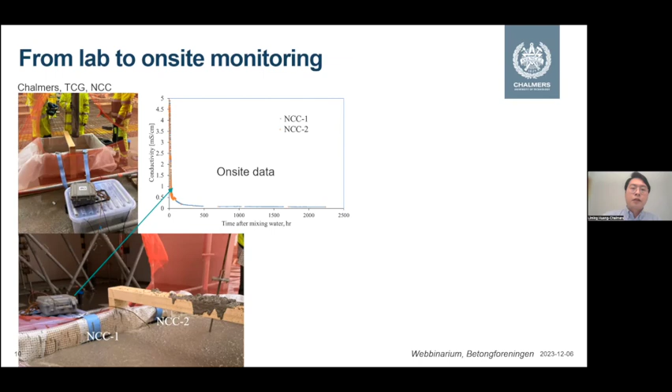An interesting point here is that the on-site concrete used a different type of cement. For the research we used cement one, but here a different cement, with a different slag replacement level and different water-binder ratio. Still, it somehow fits well with this prediction.

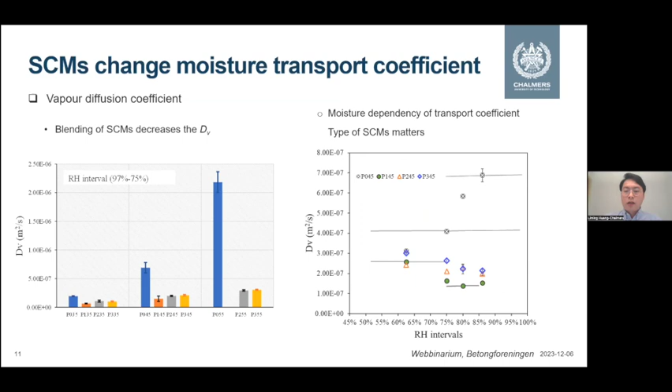Talking about durability, there are some concerns about moisture problems induced by use of SCMs. By measuring the vapor diffusion, we see that blending SCMs decreases the vapor diffusion coefficient, and also changes the moisture dependency of this diffusion coefficient. But if we use the formation factor or electrical properties to describe this effect, it matches well, at least for RH conditions higher than 75%. The correlation between inverse of formation factor and vapor diffusion coefficient is more or less linear at high RH intervals.

With this technique, we are also trying to monitor the drying process. I did not include that data here since we don't have enough time, but hopefully in the future we will publish some of these results. It's also possible to resolve the moisture profile inside concrete samples, which helps address concerns about moisture problems while implementing different kinds of SCMs.

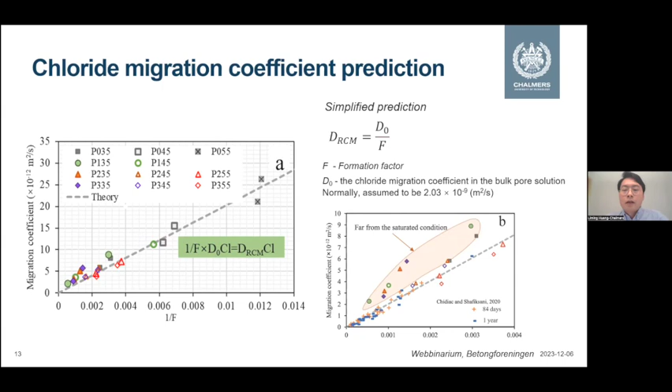We still have many interesting points and need to do more work on application in this field. To wrap up, this system has good promising potential to assess the reactivity of different kinds of SCM, and also maybe can be used for mix design and monitoring the on-site quality of concrete casting, and indicating the durability of concrete with different types of SCMs.

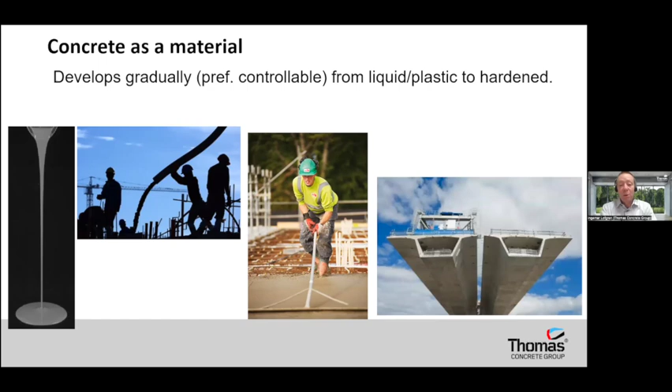In between, you also need to consider how you will finish if you have a floor like this, doing floor finishing and leveling the concrete, and then finally we'll have a structure standing there. But a lot of things can happen in between. Generally, when we look at concrete, we look at the time from mixing up to end of life and recycling.

In the beginning, control of workability and workability retention is very important, because the concrete needs to be mixed, transported to site, and cast. Then, as Ruben and Liming talked about, during the first couple of hours not much happens, but then we have the start of hydration and an increase of heat development, which is connected to early strength, and later we can have problems causing plastic shrinkage cracking in the fresh concrete.

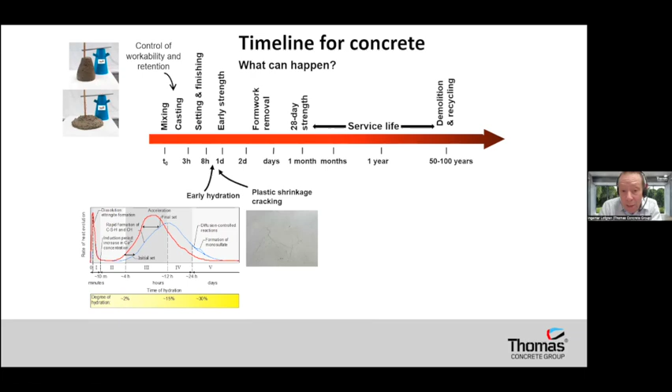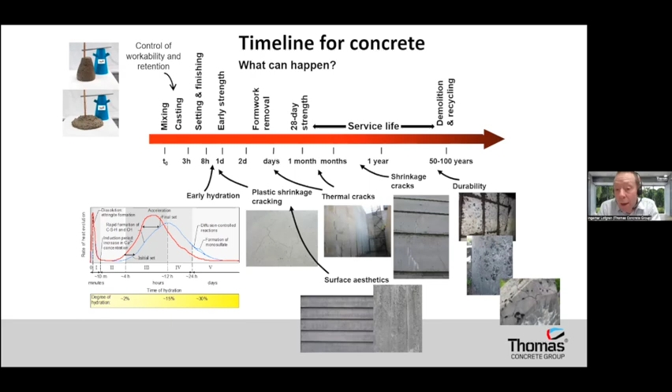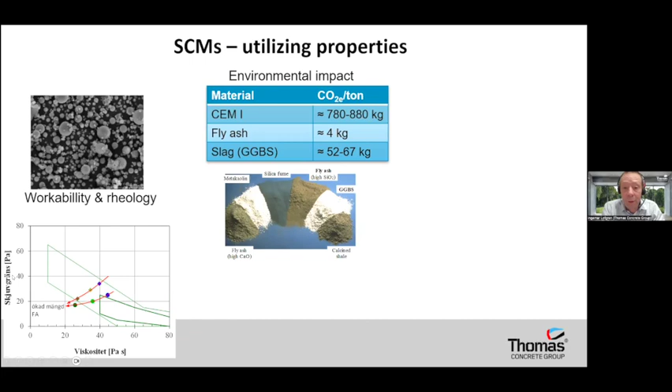When looking at supplementary cementitious materials, we look at how we can utilize these properties. A big drive is the environmental impact, so we want to use materials that can lower the carbon footprint of the concrete. But we can also use materials to improve workability or rheology, for instance fly ash, which has a positive effect on both viscosity and yield stress. We can look at materials that give lighter color or reduce heat development.

And also how they influence and affect durability. So when we start looking at new mixes, the rheology and the effect of new binders on viscosity, yield stress, and thixotropy is extremely important. We can use materials and work with how they influence yield stress and viscosity. As I mentioned, fly ash and also silica fume are very good at reducing plastic viscosity, which can be an important parameter.

So knowing the materials, we can work on how to design the concrete and design it for an appropriate use.

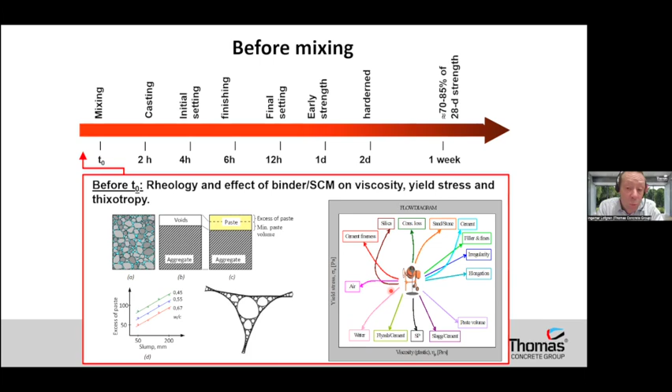When we are mixing and transporting the concrete, we need good slump retention, which is generally affected by the compatibility between plasticizers and binders, how much is adsorbed on the surface of the material, and how reactive it is. With some materials and cements we can get a big slump loss because ettringite forms on the surfaces and we lose the effect of the superplasticizer over time.

During the setting time, if we have drying conditions, evaporation, and shrinkage, we might have problems with plastic shrinkage cracking, which forms in the concrete when it's still plastic and hasn't gained any strength. The driver here is the shrinkage development, but also how pore pressure develops and contracts the concrete. If this happens when the concrete is very sensitive, you may get cracks which can be very wide and lead to durability problems.

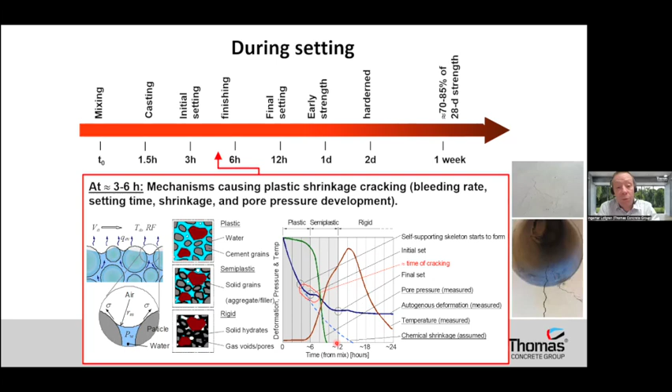Here are examples from a PhD thesis that Oskar Esping did in 2007, where we looked into autogenous deformation, measuring the shrinkage of fresh concrete 30 minutes from mixing, looking into different mixes and, for instance, the effect of silica fume, where we could see that it increases the shrinkage, and that we can also use shrinkage reducing admixtures to reduce it.

The driver for this is the hydration, but also how this early hydration drives the pore pressure development. So if a concrete is exposed to drying and loses water, the pore pressure develops quicker. But even in a sealed specimen, we see this pore pressure develop, and this causes contraction of the material. With new cementitious materials, we need to know how they influence this type of behavior.

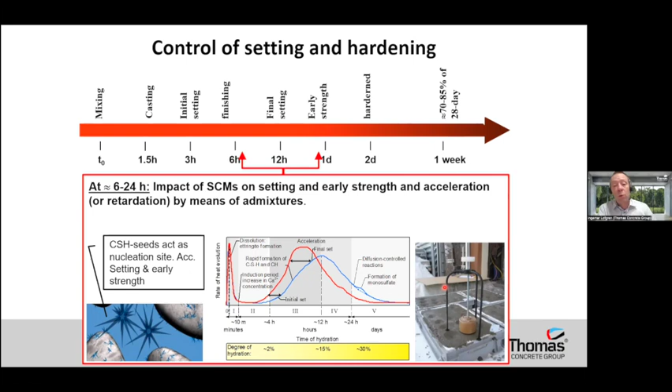For contractors, they need the concrete to harden quickly enough so they can do floor finishing or strip the formwork. So we need to look into the impacts of new SCMs on setting time and early strength, and whether we can use traditional accelerators or need new accelerators to improve early strength development, especially in cold weather conditions.

When looking at implementing new materials, here are some thoughts. Of course, fresh concrete properties are important: rheology, workability, and water demand. We don't like materials with very high surface area, which might lead to sticky concrete with high viscosity. Such concrete will be difficult to pump and more difficult for contractors to work with.

We need to know that the materials we're using are compatible with admixtures, and there is a lot of research ongoing at the admixture suppliers. This includes plasticizers, retarders, accelerators, and air entrainers that need to be compatible. The impact of new SCMs on workability retention and rate of setting needs to be known and controllable.

So admixtures are important, and they should not be sensitive to large workability loss, or even worse, have an increase in workability, what we call fluidification, during transport. And the time from when the concrete starts to set until final setting time shouldn't be too quick, because then it might be difficult to do the floor finishing.